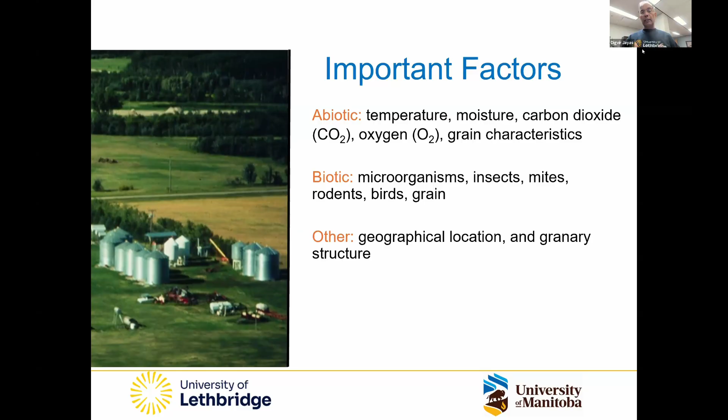But out of all these factors, the two main factors are the temperature and moisture content of the grain. Our goal is to manipulate these two main factors by designing the system in a way that gives us a long, safe storage life. In this example is a generalized curve, which applies to any grain, whether it's wheat, barley, corn, rice, lentils, or chickpeas - all of the seed types would have a similar graph.

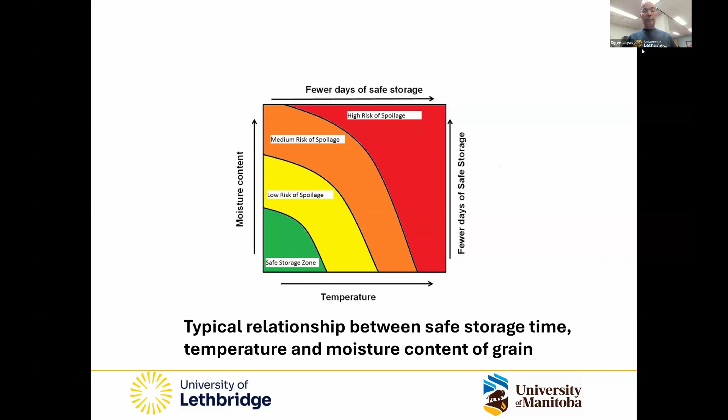On the horizontal axis, temperature is increasing from left to right, and the moisture content is increasing from bottom to top. You have zones where there's a safe storage zone - as long as you bring the temperature and moisture content of the grain into that region, the grain is safe to store, meaning you can easily store it for a year or more. There's also a low risk of spoilage zone, where if you fall in that area, there's a potential of some spoilage, then medium risk, or high risk of spoilage if temperature is too high, or moisture content too high, or both. As the risk of spoilage increases, you have fewer days of safe storage. This is an example of the guidelines for wheat.

The previous graph was a generalized graph for all grains. So this is an example of wheat.

If you were storing wheat, and if the temperature was 25 degrees centigrade, there's an expectation to store for more than no spoilage for at least 6 months. You need to bring the moisture down to around 11% as an example. On the other hand, if the moisture content was high, let's say 18, and temperature was 15 degrees centigrade, there's a risk of spoilage, and the grain would spoil under those conditions.

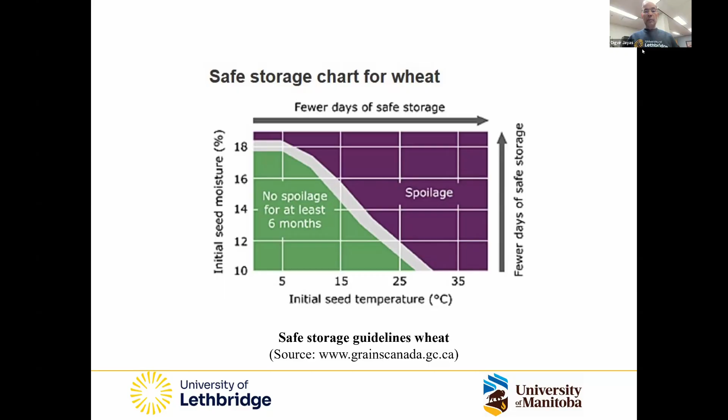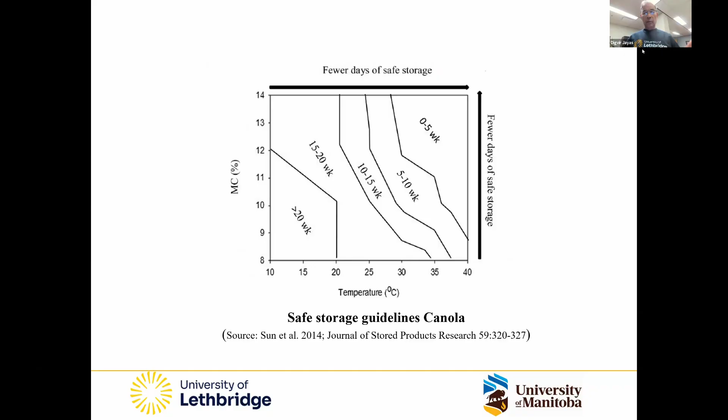Similarly, there are graphs available for canola, and our team has developed these safe storage graphs for probably, if I had to guess, between 15 to 20 different seed types. These are available on the website of the Canadian Grain Commission.

Other thing I want to highlight is the concept of how near ambient air drying works. When you force air through the grain for long enough time, it comes into equilibrium with the temperature and the humidity of the air. Depending on the temperature and humidity, it comes to a certain moisture content, and that's referred to as the equilibrium moisture content.

The curve on the left-hand side shows the equilibrium moisture content on the vertical axis and equilibrium relative humidity on the horizontal axis, and that sigmoid shape is typically the shape of the curve.

The curve on the right-hand side shows the effect of temperature. If the temperature was higher, then at the same relative humidity you would have a lower moisture content. At low temperature, you would have a higher moisture content if the relative humidity was the same. So you need to understand the effect of temperature on the equilibrium moisture content, because that's what drives the drying phenomena.

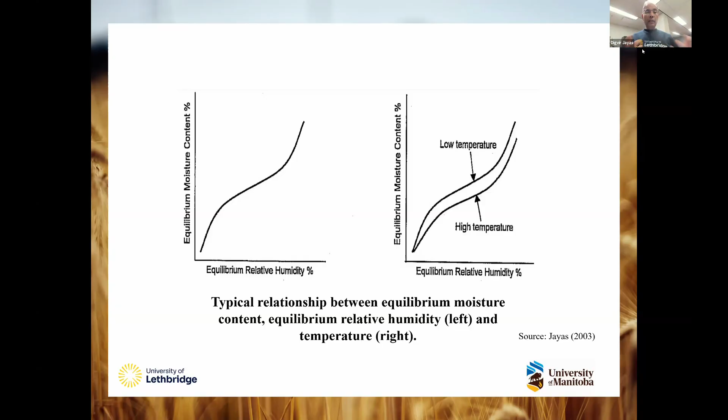Another thing you need to understand is the process of how grain comes into equilibrium with the air. Is it coming into equilibrium by losing moisture? That's desorption. Or is it coming into equilibrium by absorbing moisture? For example, if you have dry grain and expose it to high humidity, it would be absorbing moisture and coming to equilibrium by sorption.

On the other hand, if you had wet grain and were then drying that grain, it is by desorption. There's a difference in the equilibrium moisture content, and that plays a role especially if you have an automated control system, whether equilibrium is reached by sorption or desorption. If by sorption, at the same relative humidity, and you draw a line vertically, desorption would give you a higher moisture content than sorption would give you.

This is another way of looking at constant RH. At constant RH, moisture content decreases as temperature increases, as you saw from the previous slide.

These data were plotted using the EMC-ERH data based on the Henderson equation and constants from the American Society of Agricultural and Biological Engineers standards. Those standards are commonly used by engineers when designing storage and drying systems. If you want to learn more, I would encourage you to access those through the ASABE standards.

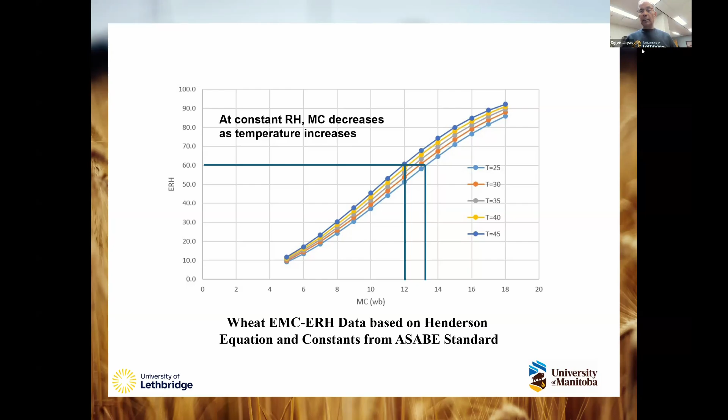This is another way of looking at similar data, but here rather than plotting them, they are tabulated. For example, at 60% relative humidity and 20 degrees centigrade, the moisture content is 13.7. As the temperature increases, the equilibrium moisture content goes down.

The numbers in red imply that potential spoilage can occur if your grain is in that region, while in black they imply that's where you would have safe storage. Depending on the lower the moisture and lower the temperature, the longer you would have storage time.

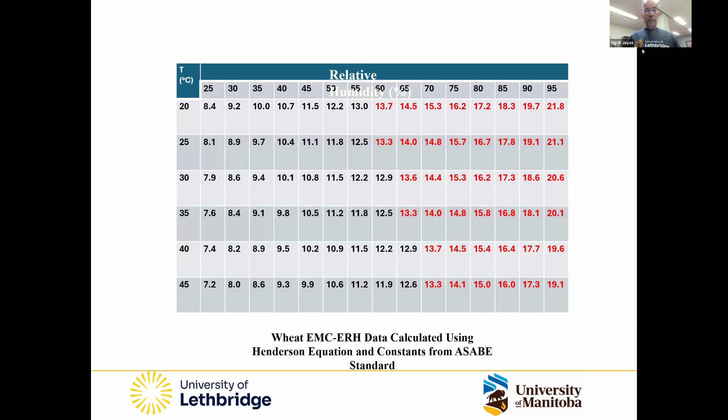Now, this table is for wheat. Similarly, this is the table for canola, a similar table as the previous one.

The one thing you would notice is that canola, if you had the same relative humidity and the same temperature, your equilibrium moisture content would be lower. So what that means is that if you want to store canola for a long period, you would have to bring the moisture content of canola down compared to wheat.

For example, with wheat, the typical storage moisture content used in the market for trading is 14.5 as a dry standard, but that 14.5 really is not a safe moisture for storage. And canola, for example, 10% is classified as dry. But again, for long-term storage, 10% is too high a moisture and canola could spoil.

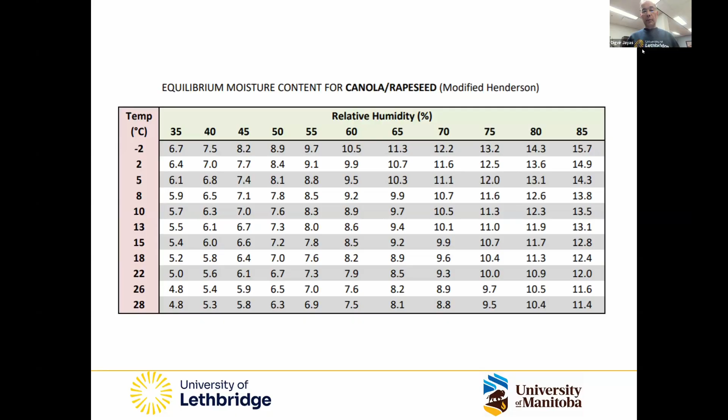As an example, canola, if you want to store for long term, the moisture content should be around 8%, and these are moisture contents on a wet basis, whereas the dry standard for trading is 10%. Wheat, same thing: trading is typically 14.5, but for long-term storage the moisture should be reduced to about 12%.

One other comment on high oil content canola: if the oil content is more than 45%, these moisture content values should be reduced by another percentage point. So if it was a high oil content canola, then 8% would go down to 7%.

With that background, I want to talk about forced ventilation terminology. You would have heard terms like aeration, chilled aeration, natural air drying. These are different terms, so I just want to clarify them.

Aeration is basically a cooling mechanism, meaning you are forcing small quantities of air through the grain to cool it. It does very little drying—you might remove maybe 0.5 to 1.5 percentage points of moisture due to aeration, though typically it's on the lower end, more around 0.5 to 0.75 percentage points.

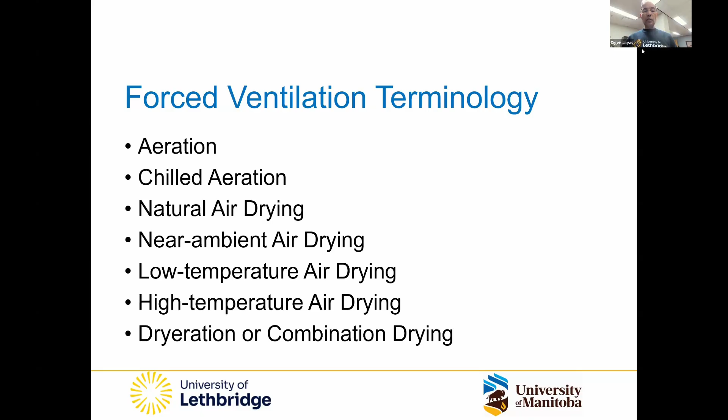So a typical ambient air drying system or natural air drying system—this is the typical system, from one of the papers Dr. Singh and I co-wrote studying the flat bottom bin system. What you see is the bottom of the bin is the perforated floor. There's a fan connected to the side of the bin, supplying air under the plenum through the perforated floor.

That air then rises through the grain, creating a drying front which moves from bottom to top. In the example shown here, the bottom portion of the grain is dried, the middle is the drying front, and the top is still wet grain. You want to make sure enough air goes through at the right conditions so the drying front moves through the top of the grain. When it has done that, your drying is complete.

A lot of these bins are equipped with many sensors. There could be a temperature cable, and some bins might have a temperature and moisture cable. Some bins have a weather station attached to it, and pressure sensors to measure the static pressure, which I'll talk about in a minute. You can have an insector which detects insect activity inside the bin. The head space might have a temperature sensor, but nowadays carbon dioxide sensors are also being used in the head space or exhaust vent where the air is discharging, because carbon dioxide is a good indicator of incipient spoilage.

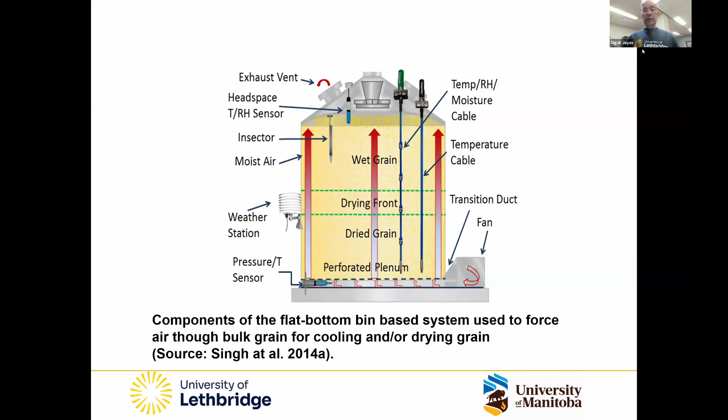This shows you another way of showing the ambient air drying. You start with the wet grain, and then as you move upward, the drying is completed.

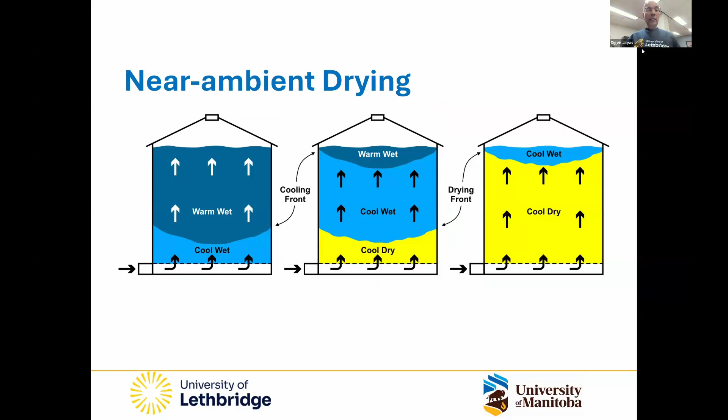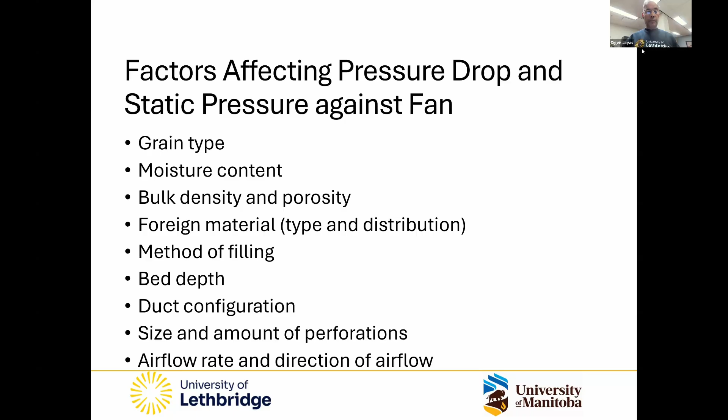Now, when you are designing the ambient air or natural air drying system, the one thing you have to make sure is that your fan is capable of withstanding the pressure drop created by the grain. That pressure drop can be affected by the grain type, moisture content, bulk density, porosity (also related to grain type), foreign material, the type and distribution of the foreign material, how you fill the bin, whether it's a spreader or a spout fill, bed depth, duct configuration, size and amount of perforations in the floor, and airflow rate and direction.

This is an example showing that different grain types have different static pressure. If you had a constant airflow rate, canola would give you much higher pressure drop per unit meter of grain depth than wheat would give. Wheat resistance or pressure drop is even higher than barley, for example.

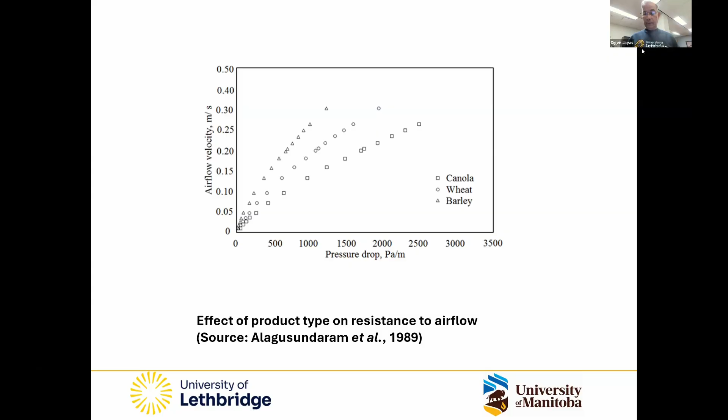The American Society of Agricultural and Biological Engineers has a standard on the pressure drop, and this slide shows the relationship between airflow and pressure drop for many different grain types. The red lines are basically showing the pressure drop for canola and wheat, showing numerically that canola gives almost double the pressure drop per unit meter of grain depth.

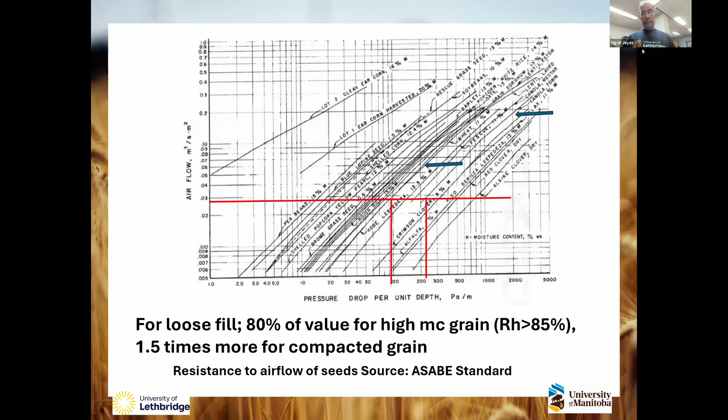Keep in mind these numbers are for loose fill. If it's a high moisture grain, you can use the values read from this graph at about 80%. And if it is a compacted grain, spreader filled, then the static pressure drop number should be multiplied by 1.5 times. Want you to be aware of that.

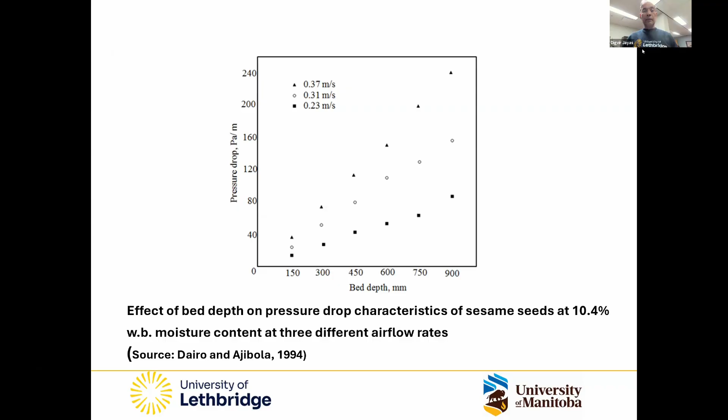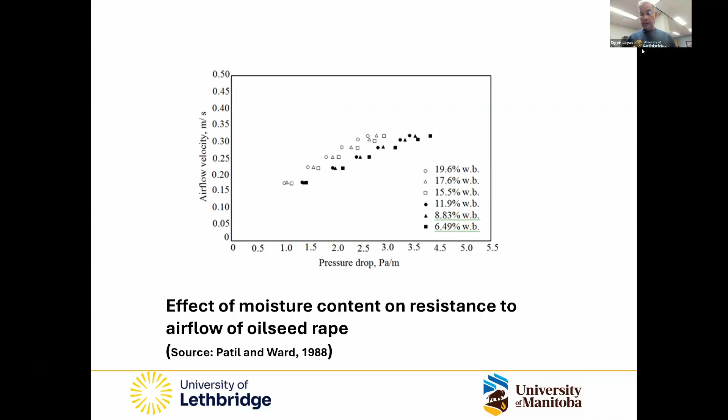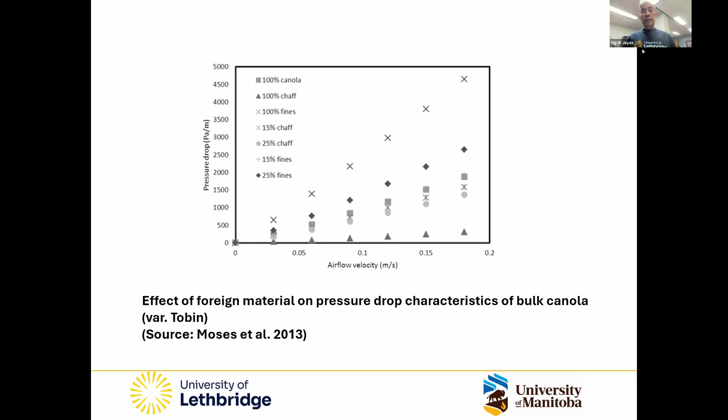Other thing is the distribution of foreign material. Foreign material in this case refers to chaff, which is particles larger than the grain kernel, and fines, which refers to particles smaller than the grain kernels. As you would expect, 100% fines gives the maximum pressure drop for the same airflow rate, and then there's a mixture of those two. So chaff would usually decrease the pressure drop, and fines would increase the pressure drop. That should be taken into consideration when selecting your proper fan size.

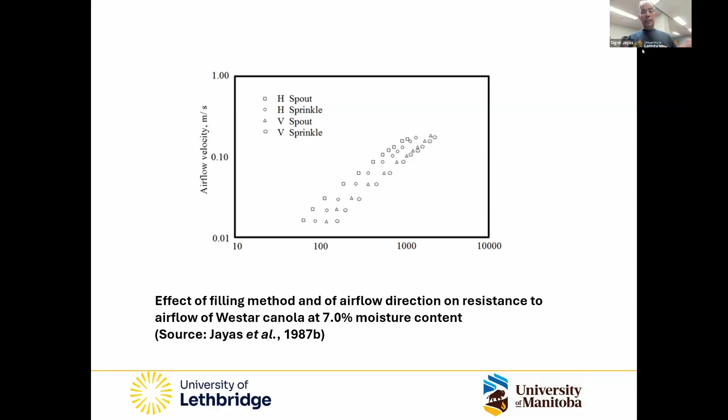This is an example of spout and sprinkler fill, and the direction of the airflow also has an effect, which I'll come to in a minute - this is the resistance to airflow. Typically, bins are filled from the top and the air is forced from the bottom. Almost 35 years ago, our team was the first to show that the resistance to airflow is less in the horizontal direction.

And when I say less, roughly about half in the horizontal direction compared to forcing the air in the vertical direction. So at that time, I started conceptualizing and promoting in the farming community that we need to move to a horizontal airflow drying system, forcing the air horizontally, which gives you more uniform drying, takes less energy, and static pressure is predictable all the time.

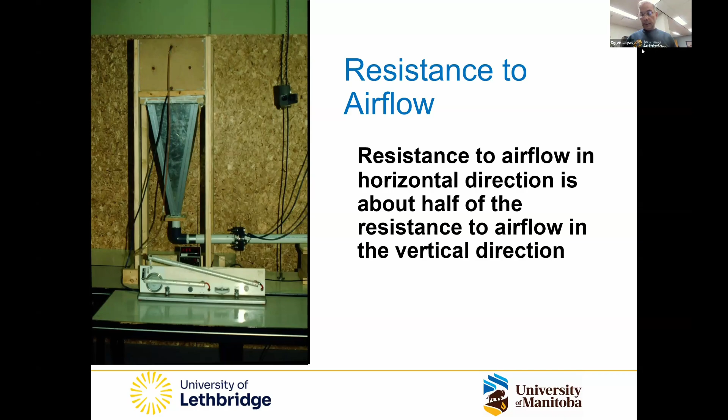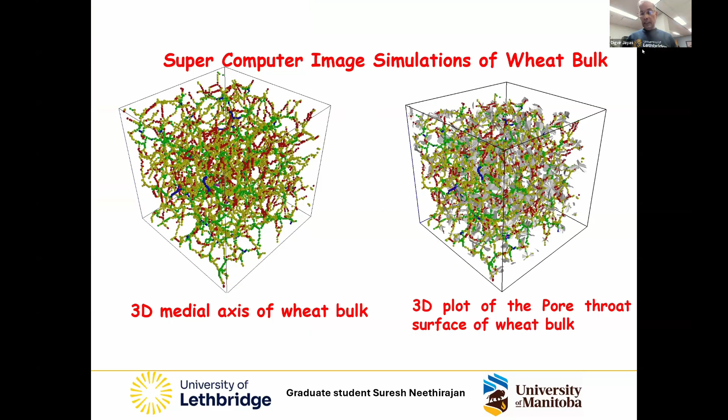We did some CT scan and computed tomography images to understand why that difference is there. And this is just an example of that.

And another example. Then we designed a full-scale drying system for a full-scale size bin, where the duct was in the center as a perforated tube, and the air was then allowed to flow horizontally and was collected on the side in perforated tubes and then discharged to the outside.

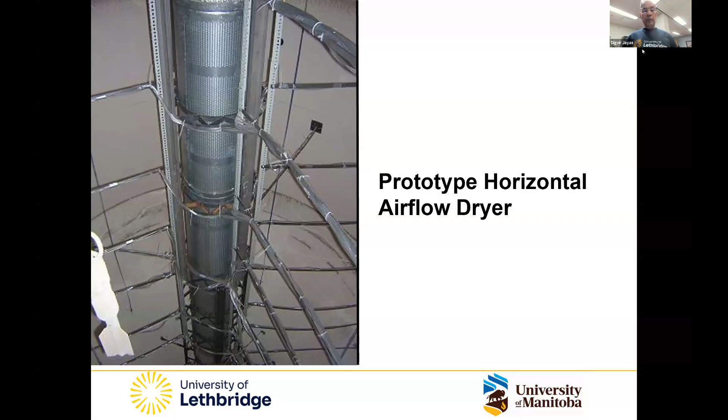And now there are companies like Gatco, a good example, marketing and distributing horizontal airflow drying systems across Canada. And I have seen similar systems, as I have made presentations in many different countries. In 2019, I was in China, and they have developed enough horizontal airflow drying systems that 3 million tons of grain was being dried using horizontal airflow drying systems.

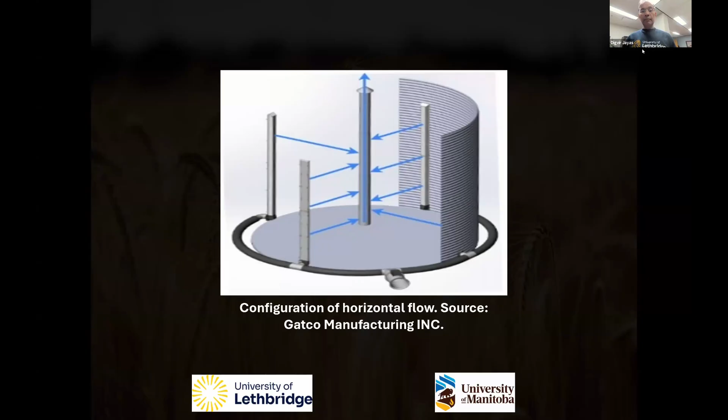So other thing I want to point out is, so you understand the static pressure, and also you need to understand what is the size of the fan you are purchasing. So when you buy a fan, the manufacturer would usually give you a curve, referred to as fan characteristics or fan curve.

Why this is very important to understand is that if you were filling the bin for 1 meter, and then all of a sudden fill it for 3 meters, the static pressure from that grain would be 3 times what it was for 1 meter. So if your airflow was enough to do the drying for 1 meter depth, then for 3 meter depth it's not going to work, and it would be under design. So that's why you have to make sure the fan is providing enough air.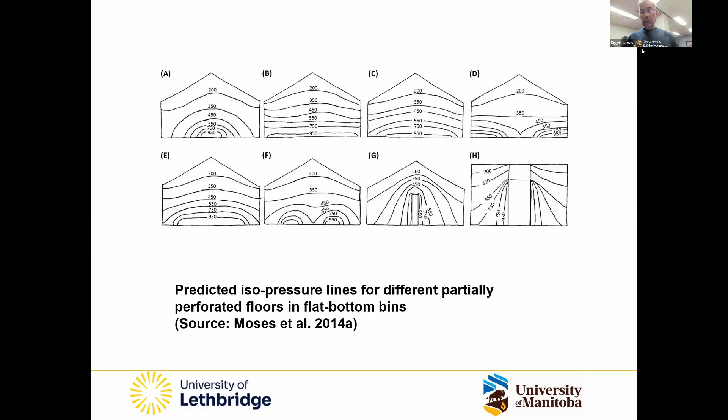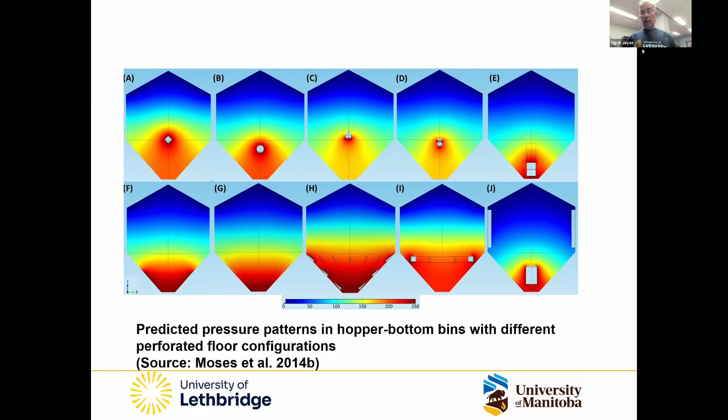You can have a fan turned on the day you fill the bin and leave it on until a certain date, for example mid-November, and that would be referred to as a continuous-on strategy. You can turn the fan on in the daytime, or in the nighttime, or use a timer control that only turns it on for a certain time to a certain time. So for example, you might turn it on during the daytime and off at nighttime.

You can also do it on a thermostat basis, based on the temperature, or humidistat based on humidity, or based on the temperature difference, delta T, delta RH, or natural air drying, or

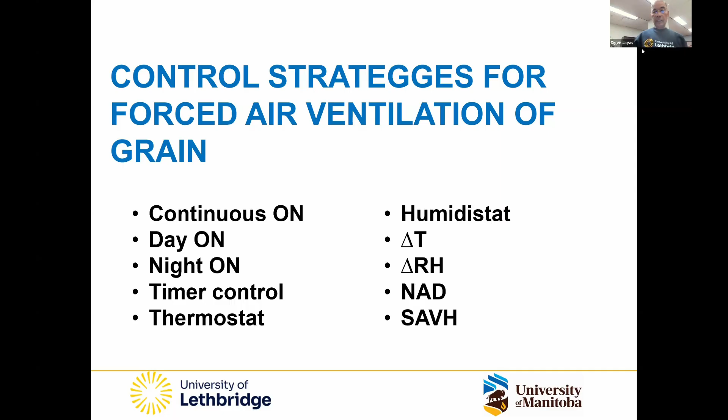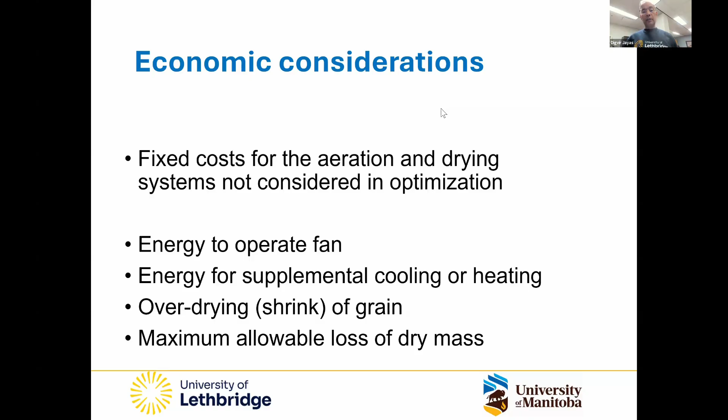Maximum allowable loss of dry mass is also optimized. That is, when grain is being stored, how much is being converted, because when grain spoils, it produces carbon dioxide, moisture, and heat, and in that process the dry mass is degraded. The typical criteria used is that you should not have more than 0.5 percentage point of grain dry mass loss to consider the drying successful before spoilage has occurred.

Should I start? Yes, please.

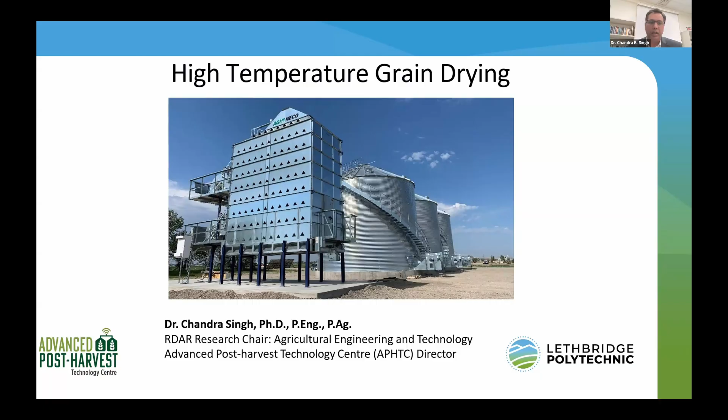My name is Chandra Singh. I am RDAR Research Chair in Agricultural Engineering and Technology at Lethbridge Polytechnic. RDAR is a provincial funder in Alberta that funds applied research in agri-food. Our center focuses on storage, handling, and processing of major Alberta crops, which are also common in other provinces, such as cereals, oilseeds, pulses, potatoes, and sugar beets.

Our program has received funding of over $10 million in the past 5 years. That includes a 2.4 million CFI grant for establishing the center, which includes the grain storage and handling research facility, with a 12 million BTU high temperature grain dryer, and three 20,000 bushel grain bins equipped with full monitoring and automated fan and heater control.

My teams usually have 5 to 8 postdoctoral fellows with backgrounds in biosystems, food engineering, food chemistry, food science, and horticulture.

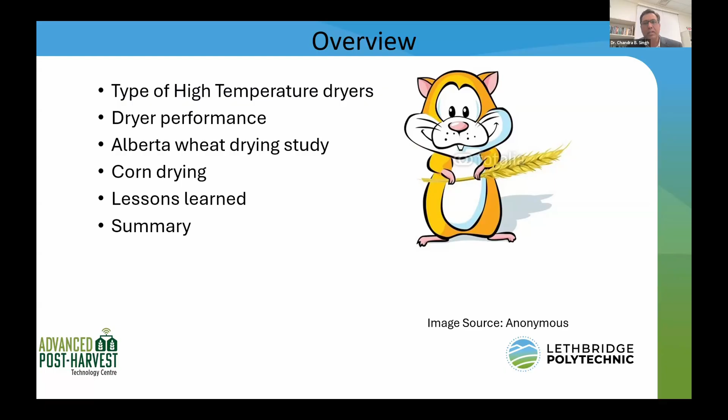So I will be talking mainly about high temperature dryers, dryer performance, and some of the work that we've done extensively in Alberta for wheat drying, and our recent experiment for corn drying at our own research farm, and what lessons we learned from commissioning of the dryer, and then I will summarize my presentation.

So why high temperature drying? There are several reasons farmers choose high temperature drying. Number one, as we live in very cold and extreme weather conditions, there is minimal weather dependency. It is less dependent on the weather, whereas cold, wet, snowy conditions limit in-bin drying. Drying is continuous, so it's faster, which can prevent spoilage.

As we saw, the safe storage time is a combination of moisture, temperature, and time. High temperature drying can remove up to 10% moisture in a single pass, whereas in bin systems typically only 3 to 4% is ideal to eliminate. A wide variety of grains can be dried in high temperature drying, and these dryers are fully automated and remotely monitored.

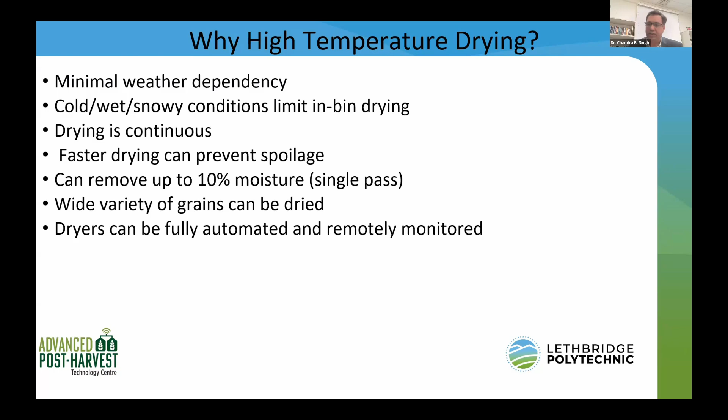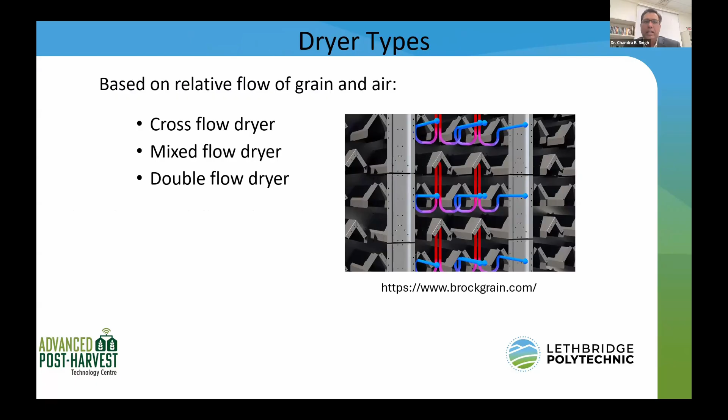There are three main types of high temperature dryers. You might have already come across these names. They are relative to the relative flow of grain and air, their movement. They're called cross flow dryer, mixed flow dryer, and double flow dryer. I'll tell a little bit more about each.

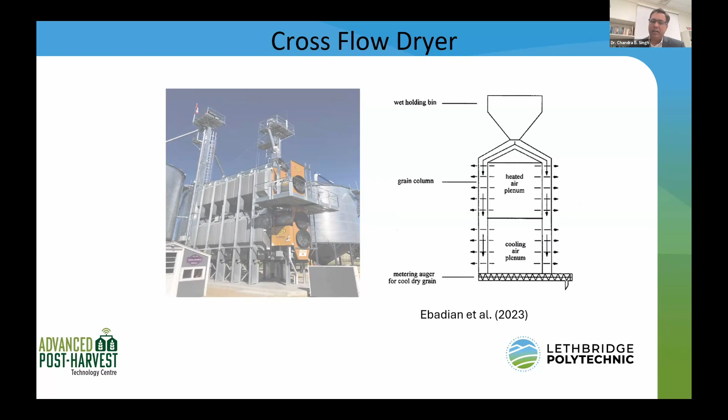So there is another type of drying system, and many claim it to be better. In this mixed flow dryer, as the name suggests, the grain and air are mixed as the grain moves through the dryer column. One advantage is there is more time for the grain to be in contact with hot air.

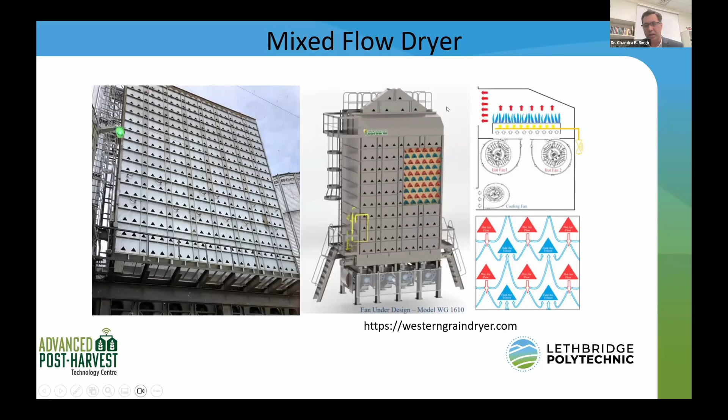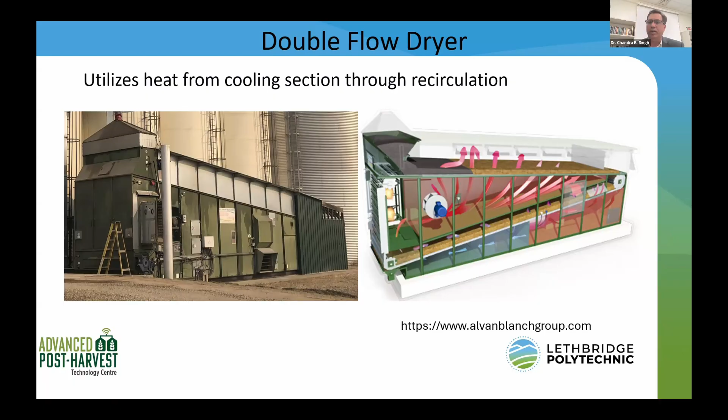How do we measure dryer performance? There are several variables that are important, and I would say all of them are important. Number one is energy.

How much fuel consumption, how much electricity is required for the fan, auger, and other moving equipment. Fuel is mainly natural gas or propane. We focus on natural gas, which is very common for these dryers in Alberta.

Dryer capacity is also very important, whether that dryer is sufficient for your needs. Are you able to move enough grain to dry every day? That's very important. If you're not able to meet your requirement with that capacity, maybe it's energy efficient but not fit for you. So that should be a consideration.

Moisture removed: how much moisture is actually removed from the dryer on a per-hour basis. This is another important factor. Again, if you try to remove more moisture, that means the capacity will be lower.

Quality of the dried grain. Because the grain is exposed to high heat compared to an in-bin drying system, even with low temperature heaters where heat is mild, the grain temperature affected by high plenum air temperature affects the quality. That's another important parameter for many crops.

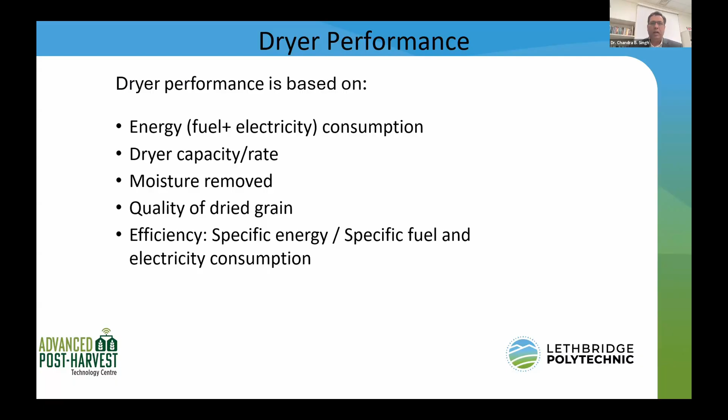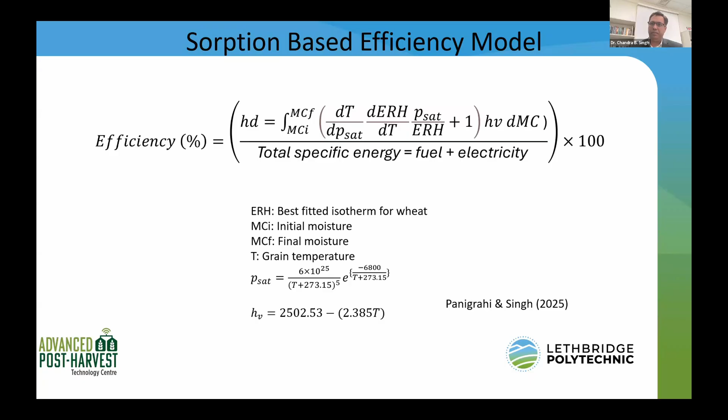In our study, this was funded by Alberta Wheat Commission - now it's called Alberta Grains, Saskatchewan Wheat Development Commission, RDAR, CAP funding, as well as Alberta Innovates. So we partnered with farms across Alberta.

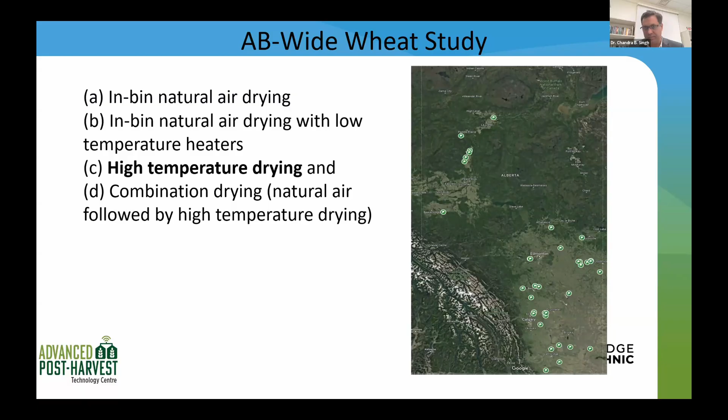We found most of the high temperature drying happening on the north side, further north of Edmonton, at those farms or in that area.

So these are different types of dryers that I mentioned. We were fortunate to get a mixed flow dryer, a cross flow dryer, as well as one recirculatory dryer, which they call a double flow dryer. And they are very new.

Some of them are very old, relatively smaller capacity of say 25, 30 tons per hour, all the way up to 118 or 120 tons per hour capacity. And different mix of designs, number of fans, fan location, as well as different types of mechanisms for different fans and where they are located within those dryers.

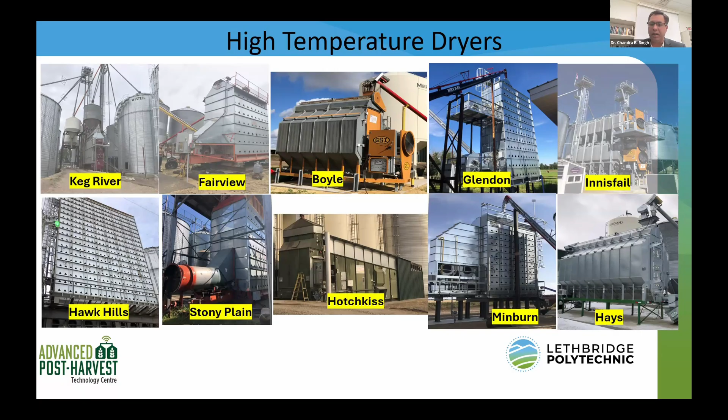We did this study for 3 years. We collected data in some farms for up to about 1 to 2 weeks, covering about 100,000 bushels of dried grain from some of the dryers, collected by my team.

What data did we collect and why did we collect it? I showed you that we need to measure performance. So we measured initial moisture content when grain enters the dryer and final moisture content when it leaves the dryer, as well as grain temperature before and after drying.

Fuel consumption - natural gas was the main fuel for the burner. We took the reading of the meter before we started a particular batch, typically over 30 minutes, and then after every 30 minutes we took another reading, and they were all normalized data from these readings.

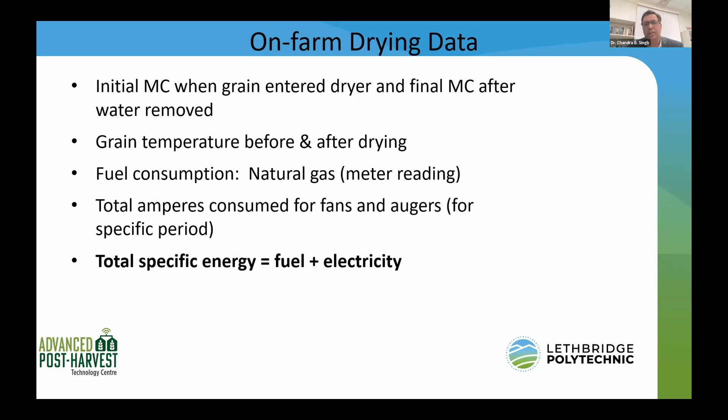Similarly, we measured amps consumed for the fans and auger specified for that period. Then we calculated specific energy per ton of moisture removed, and did the same with different dryers, and we came to some conclusions here.

The first finding is very simple, but still very important: the smaller the dryer-to-ambient temperature difference, the better. In the top graph you see, the bottom is the difference - dryer minus ambient. If that difference is less, it means the air is already heated enough and doesn't require a lot more heating. And obviously, we found that efficiency is higher in that case.

Second, we also found the grain temperature matters.

When the grain has lower temperature, as you can see in the bottom chart here, if the grain temperature is low, for example 15 and below, our efficiency is close to 40% or below. As the grain temperature increases, our efficiency goes up. But after a certain point it starts to come down, because the gradient is less now between grain and plenum temperature. So these are the two variables that suggest that if you're running the dryer very early in the morning in the winter, that will be the lowest efficiency. And if the grain is cooler, the cost of drying will be more.

So that's why in some studies it's suggested that if you can keep the grain in a bin or preheat it, that preheating actually helps to improve the drying efficiency. If you're leaving it in a holding bin, probably it will respire and increase the temperature, that sometimes helps. Or you can use a low temperature heater and heat it in the holding bin, then move it into the dryer.

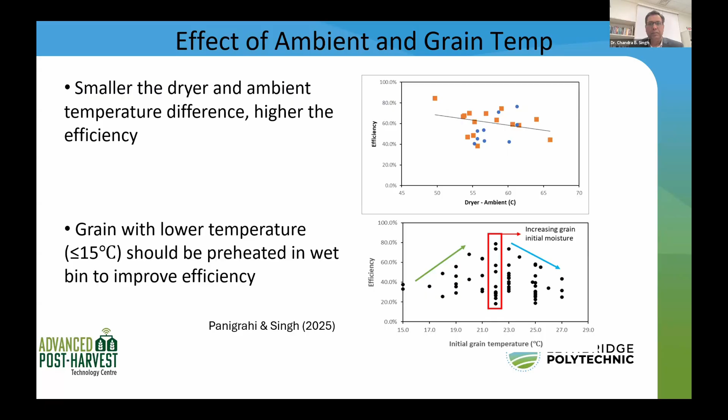This is the effect of grain moisture on efficiency. This is the difference between initial and final moisture, meaning how many percentage points of moisture you are removing. What it tells us is that if you're using a high temperature dryer for 2% or less moisture, or 3%, they are not efficient. I don't think anybody should use a high temperature dryer if they have to eliminate only 2 to 3%. In-bin drying systems, which Dr. Jazz talked a lot about and gave so much information on, are sufficient to do that job. Whereas if you need a higher amount of moisture removal, 4 to 5% and at least 3% or more, then these high temperature systems are more energy efficient, as this chart shows. Also in this case, the orange boxes show the top efficiency: the double flow dryer, which uses the recirculatory heat system, has the highest efficiency of over 91% compared to all other dryers. We also looked at the cost of drying with increasing initial grain moisture.

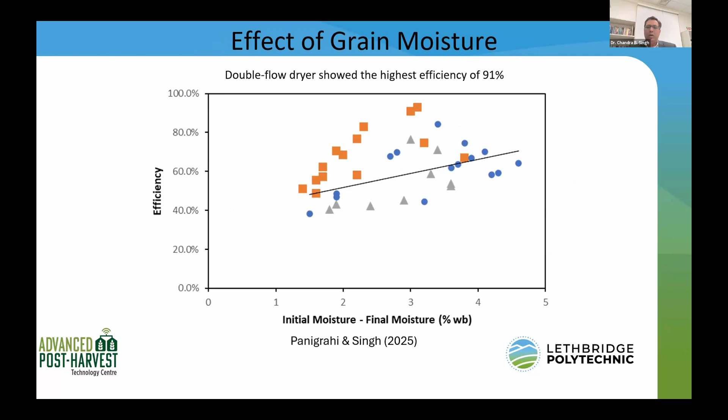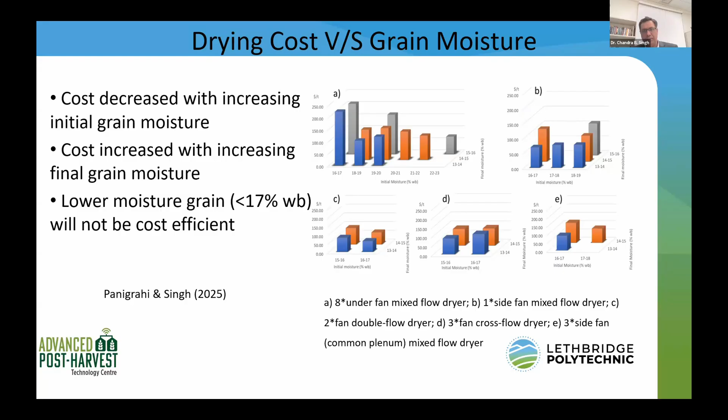If you look at the bar chart here, what it tells you, as I showed in the previous slide, is that efficiency is less for removing less than 3% or 2% moisture, and that impacts the drying cost. So it's obvious. If you look at this chart on the right side, the very top plot A, there are different dryers, but just take plot A. If you're removing moisture from an initial of 16 to 17%, the blue solid dot on the first side, meaning you're bringing in grain at 16 to 17% and targeting 14%, you're removing basically 1 to 2% moisture. What that does is make the cost per ton of drying very high. Whereas if your initial moisture is higher, say 20, 21%, your cost per ton of moisture removal is less. So again, this suggests that if you already have lower moisture, tough grain at 16 to 17% in this case wheat, and you have to remove less than 3% moisture, these systems will cost you more.

We also did cost prediction and estimates for each dryer type. These are different dryers. The blue solid bar is the fuel cost, but farmers also have to pay carbon levy on the fuel. In each chart, the top one shows the carbon levy cost is more than the fuel cost. The highest cost for a large capacity dryer, one of the less efficient 8 under-fan mixed flow dryers, was on average about 113.4 to 162.3 dollars per ton of moisture removed. Just to clarify, this is not per ton of dried grain - I was asked this question in one of the presentations. I want to clarify that this dollar figure is for tons of moisture removed, but it's still high compared to other more efficient dryers.

As the dryer efficiency showed, the least cost was observed with the double flow dryer, averaging about $63.50 to $91 per ton of moisture removed. Interestingly, carbon levies were 25% higher than the fuel costs. So if the fuel cost was $1, it would cost the farmer $2.25 to dry the grain, because there's a $1.25 carbon levy on the fuel.

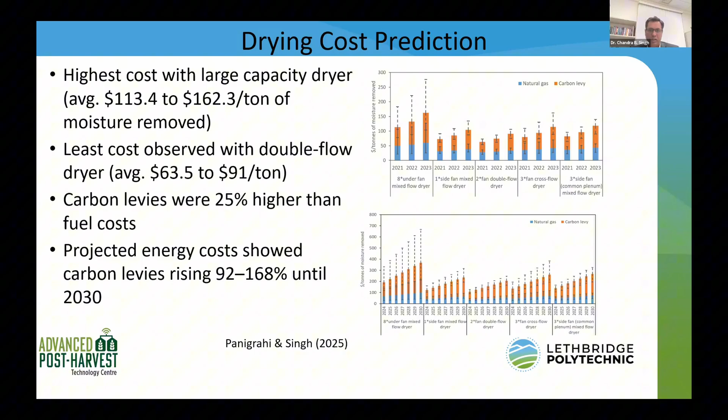We also did a combination drying study. As the name suggests, that's high temperature drying followed by in-bin drying. So basically, you dry the grain 1 to 2% higher than your target storage moisture, and then remove that additional 1 to 2% moisture using the in-bin system. In this case, a 6-point total reduction.

Out of that, 1.5% moisture removal happened in the grain bin. One important thing we learned is about the airflow. This bin has very good airflow, from 0.4 to 0.8 CFM per bushel in that range, based on how much grain you have.

This in-bin drying was fully automated, which took about 8 to 13 days. We compared conventional high temperature drying with combination drying, keeping all parameters the same, and estimated that you save from 19 to 33% more energy by using combination drying rather than doing all the drying in a high temperature drying system.

So if you look at the cost of drying per ton, this is a significant saving without having to improve much in terms of your infrastructure.

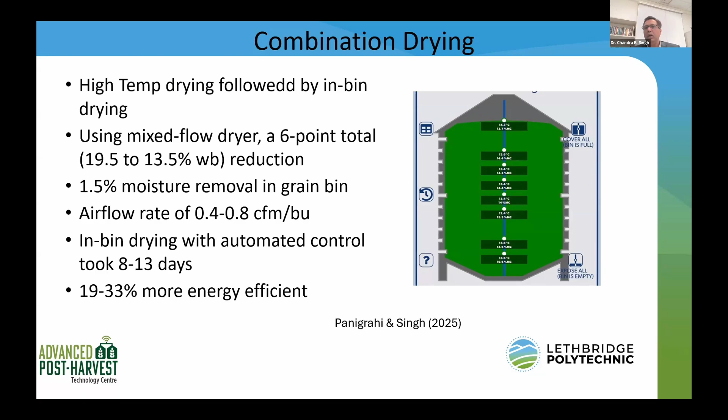Now I come to our corn drying experience in Alberta. This is part of our Advanced Post-Harvest Technology Center's grain storage and handling research facility.

That means we can use both fans to run at full heat, or we can use one burner, the top typically to dry, and the bottom to cool and remove some moisture due to evaporative cooling.

This is a fully automated facility, and we also have a remote monitoring option where we can remotely monitor moisture, temperature, and the overall drying operation.

We did a study earlier on in-bin drying of wheat, which I'm not presenting, but we used our drying system, an in-bin aeration system with low temperature heaters, and dried durum wheat from 18 to about 14% using these bins.

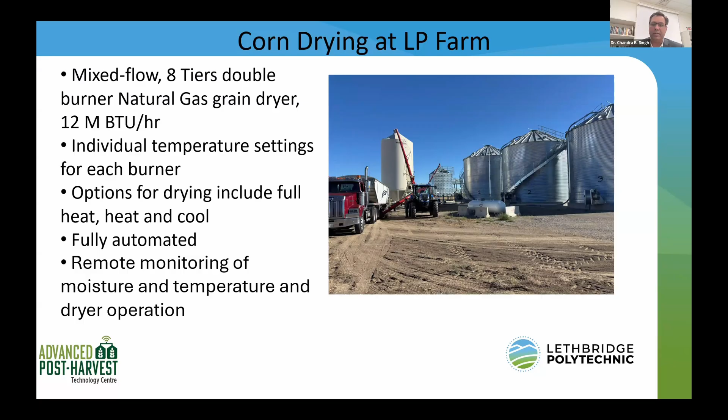If you look on your left side, you can select the corn, and then we have 2 fans, number 1 and number 2. Fan number 1, when we started commissioning this year, was giving off some high temperature, so we reduced the speed to 90%.

They are VFDs, so they're not running at full speed. We're still trying to figure out why it's not operating at 100% without producing extra heat from the motor. The second fan we ran actually at 100% power.

It's recommended that even in full heat mode, the bottom burner should run cooler than the top burner. So we operated it at about 200 degrees Fahrenheit at the top burner, and 180 at the lower or bottom burner. Because the more heat and moisture removed from the top column, the less heating the grain needs at the bottom.

Also, you can input your grain moisture. You can collect samples from the sample collector on the dryer, and also monitor the discharge rate, which is also very important. If you're removing less moisture, then your discharge rate can go higher, meaning you're removing more grain per hour from the dryer.

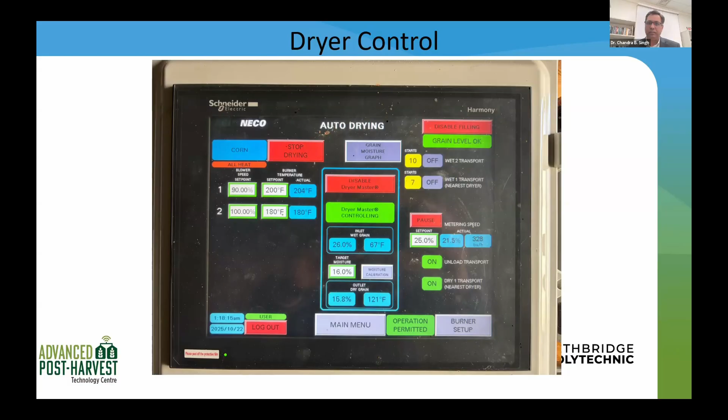Corn is a relatively new crop in Alberta. There might be some random farmers growing it, but it's getting more attention, and acreage is growing every year. So they were combining the grain. When they got here, it was 35% moisture content, and they planned to dry it down to 14%.

That dryer is 12 million BTU. It has a lot of heat, but it's not capable of removing almost 20% in one pass. So what we did was dry it to around 25% in one pass and moved it into the bin. We have a pneumatic conveying system with a blower that automatically moves the grain into the bin. So we dried from 35% to 25%, moved that grain into the storage bin next to it, unloaded it, and put it back into the holding bin. Then from 25%, we dried it to 15%.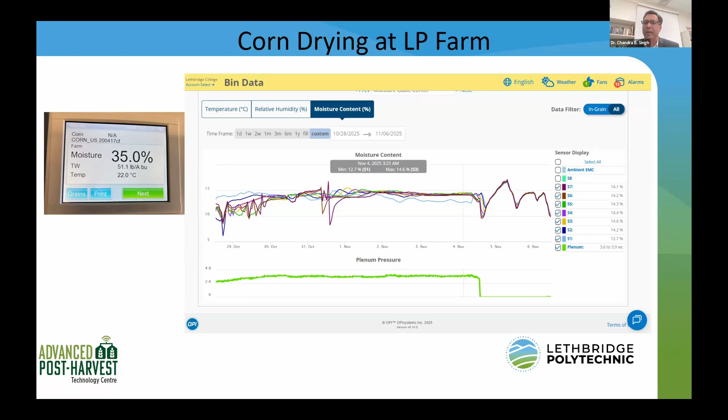Excess moisture. But with the drying, they were able to deliver that grain within 15% moisture, no discount, no issue. So this is the advantage of having the drying capacity.

We installed the dryer about 2 years ago here at our research farm. Last year, we tried to get some tough grain—tough means over 17% for wheat. We did not get it; Southern Alberta is usually dry, so we get dry grain combined. But corn takes longer and its harvesting is delayed, and that's why we were fortunate to find a farmer who was willing to work with us and provide grain for the drying.

The first thing we found was that there are two moisture sensors—one where the grain inlet is at the top, and one where the grain is leaving the dryer near the sample holder. Somehow they were swapped. So our inlet moisture was reading 16 and outgoing moisture was reading 25, 35. That gave us a crazy run for a few hours before we figured that out.

So it's very important that sensors are calibrated, marked, and located in the right spot to make sure that your inputs to the dryer are correct for automation. Regular sampling is also important so that you can feed in the actual value you're getting, not just relying on the sensors, but actually measuring what you are inputting to the dryer and what you are taking out of it. That's how these systems learn smartly and operate in a much more efficient way.

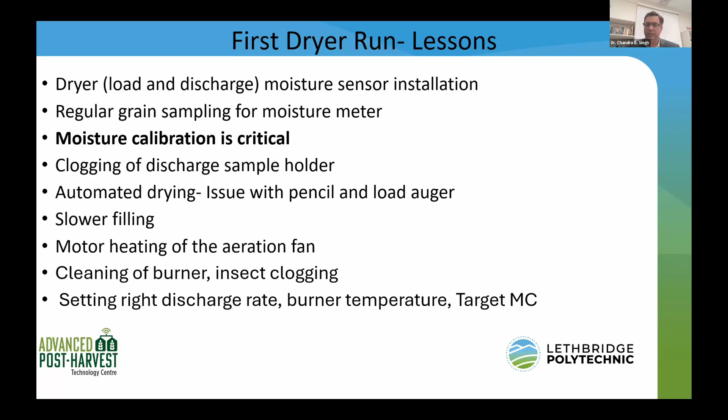This is my summary. I would like to conclude that the double flow dryer with heat recirculation was the most energy efficient in our wheat drying study. Discharge rate should be optimized; this is very critical for your target moisture and energy efficiency.

Grain with initial moisture below 17%, in this case wheat, should not be used in a high temperature dryer because it won't be energy efficient, unless you have no other options. Grain temperature below 15 degrees Celsius also reduces your energy efficiency.

Regular grain sampling for moisture calibration is very critical. Make sure your benchtop moisture meter is calibrated and accurate, and that you are feeding that data into your system for regular operations.

We also explored combination drying, which can remove 1 to 2% additional moisture in a storage bin and result in up to 33% energy saving.

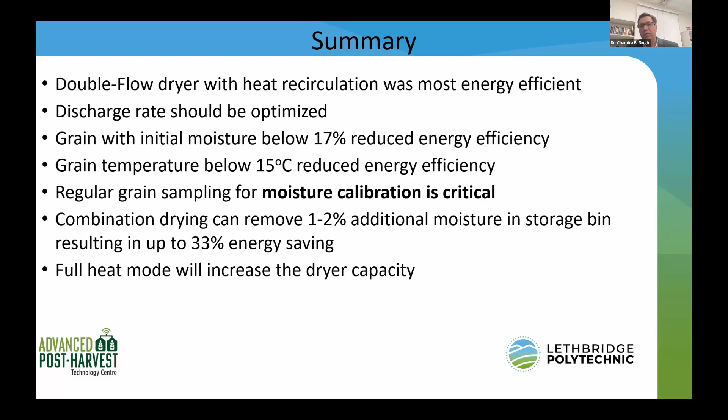We used some dryers in full heat mode and some in heat and cool mode, but our recommendation is to use full heat mode, with the cooling part done in the bin as combination drying. This has two advantages: it's more energy efficient and it increases dryer capacity. Typically, with heat-cool mode dryers, using full heat lets you move more grain per hour, more bushels per hour.